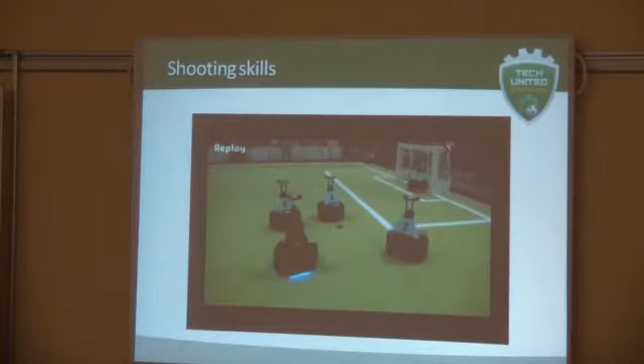Excited, and I'd like to present some work on our killing skills, our shooting skills. To illustrate this presentation, I will start with a nice video. This video is a game against CAMBADA, and we make such a beautiful goal. However, seeing this goal, we were as surprised as everybody else that we could make this goal. So therefore, I want to present you today our work on repeating such goals.

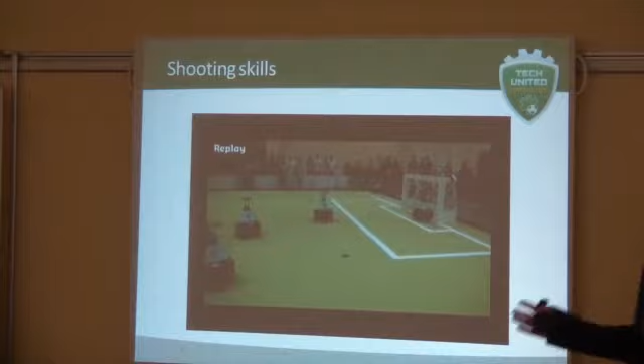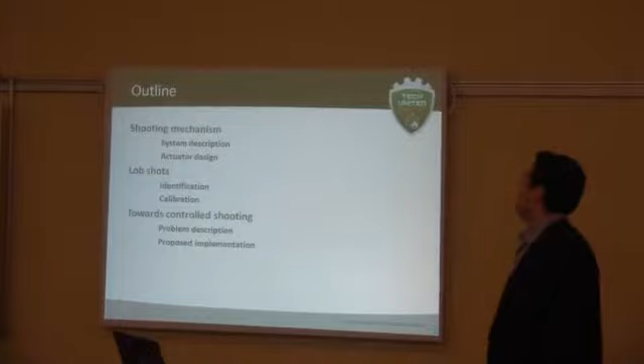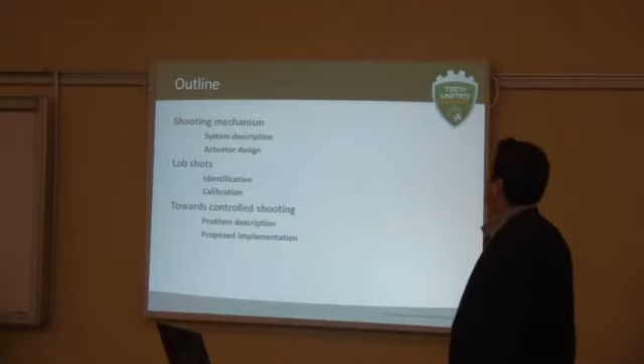First, I go more into detail in our shooting mechanism - what the system is about, the design of the actuator. Then I will continue about our lob shots. First, we have to identify a system and then calibrate it. And then I will tell a little bit about our work towards controlled shooting. I'll tell you the problems we have, and then some proposed implementation.

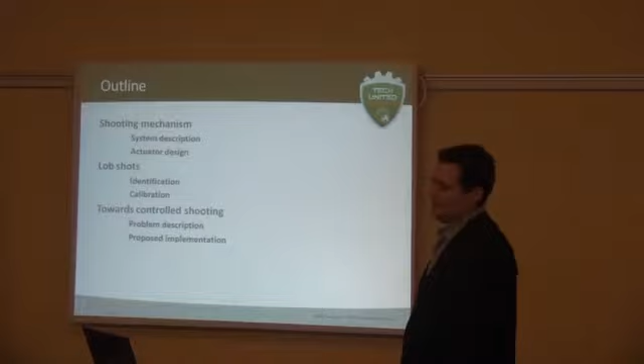So, the shooting mechanism. Before we can design, we need to have some requirement specifications. We want to have a controllable shooter, which can shoot hard, soft, can shoot a lob shot or just a flat shot, and of course, very important, repeatable.

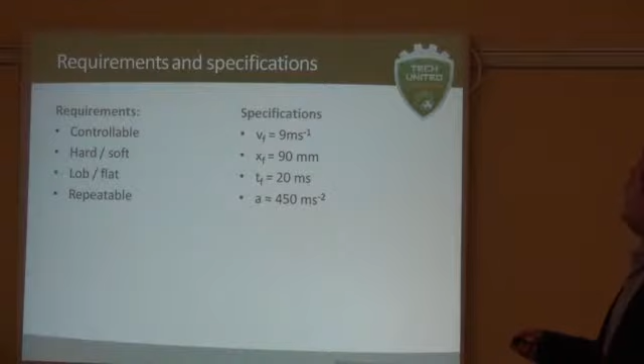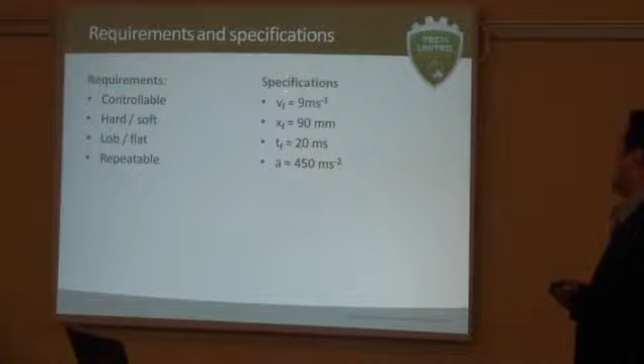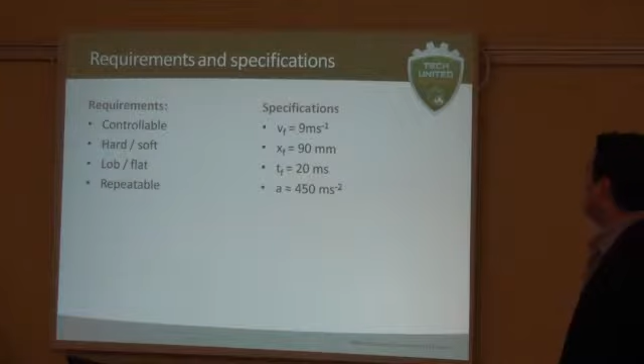As these are rather vague terms, I'll come back to these more later in this presentation, but we also have some hard specifications, such as we want to have an end speed of 9 meters per second of the actuator. The moving part moves 90 millimeters, and it should all happen in about 20 milliseconds. We want to approximately have 450 meters per second squared acceleration.

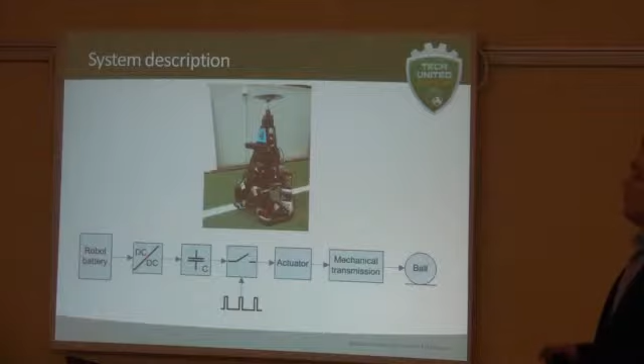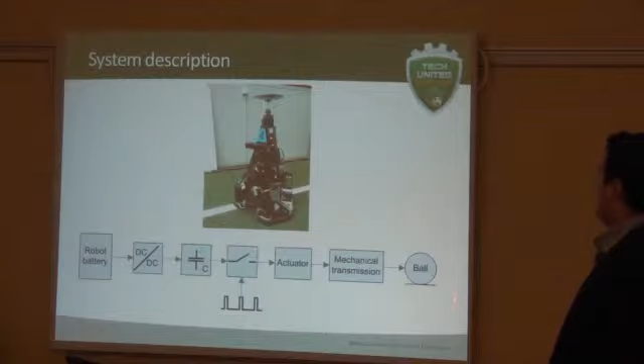So the system - the shooting system is built up from our robot battery. We convert that to about 350 volts into a capacitor, and this capacitor, by using an IGBT and a PWM modulation, excites the actuator, which then has a lever and a pin on it, and it will shoot the ball away. Now for this moment we go more into detail in the actuator design.

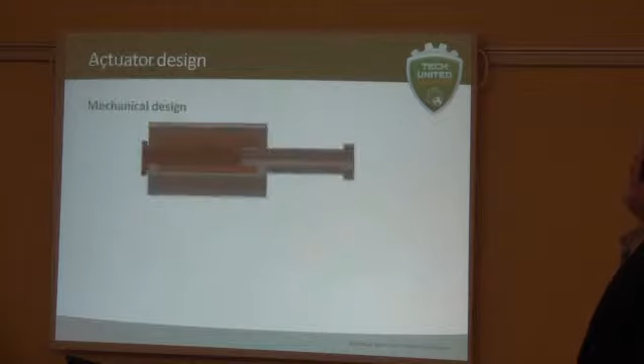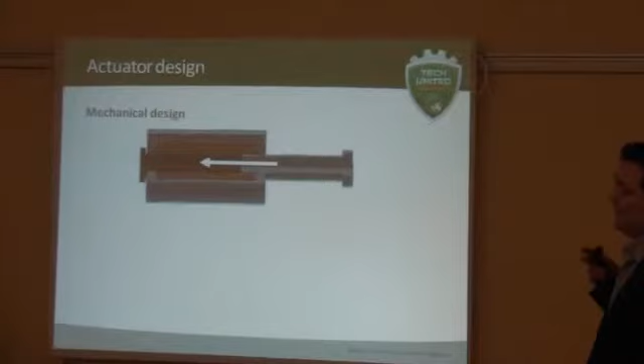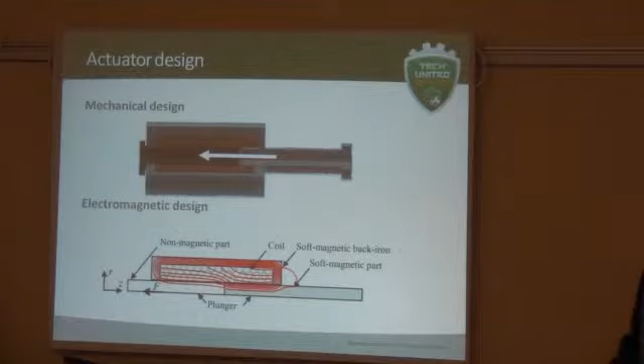The actuator design has a mechanical design, so it has a stator and it has a moving part. This moving part will move in this direction. Looking at this design electromagnetically, we can see a soft magnetic part in the back, a magnetic part of the plunger, and a non-magnetic part of the plunger. By exciting the coils, we create a magnetic field which will attract the soft magnetic part, and therefore it will shoot, it will go in this direction.

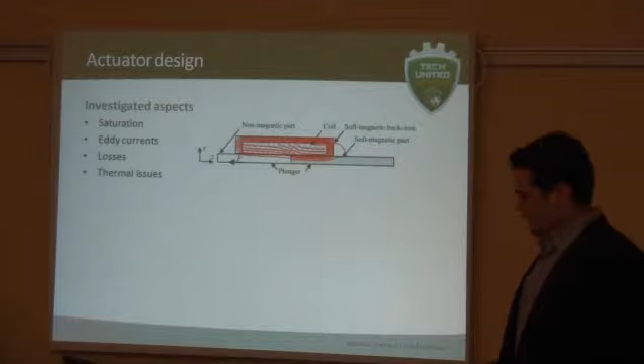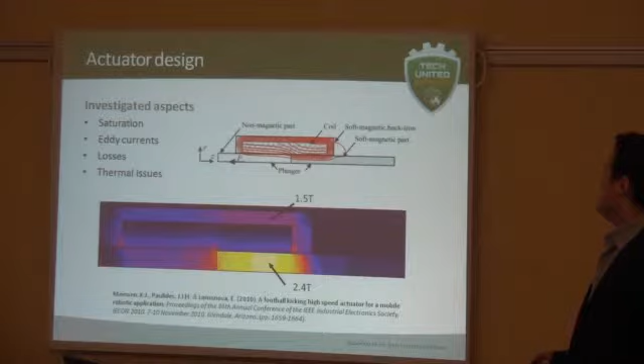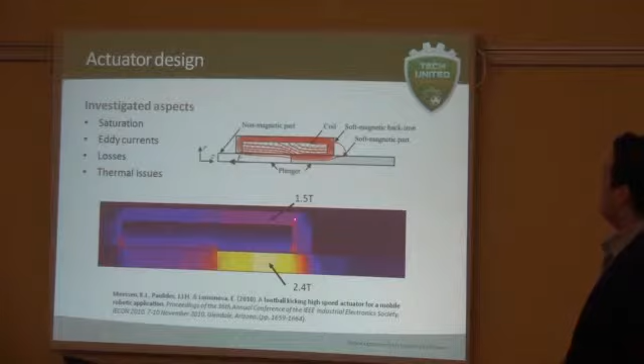In this design we had to investigate several aspects, such as saturation, eddy currents, losses, and thermal issues. First we looked into saturation - how much current can we excite before we get into saturation? On this picture you can see we designed the actuator in such a way that we reach the top of the linear part of the saturation curve, so we get the best losses, current, and force ratio. As you can see, it's nice, about 2.4 Tesla here, and in the back of the stator it stays nicely unsaturated for 1.5 Tesla.

Then we have the final design, which came at a 4.5 kilogram total mass. We have a peak force of 700 Newton, and the peak current is 110 amps. So we generate 700 Newton by exciting 110 amps in just 20 milliseconds.

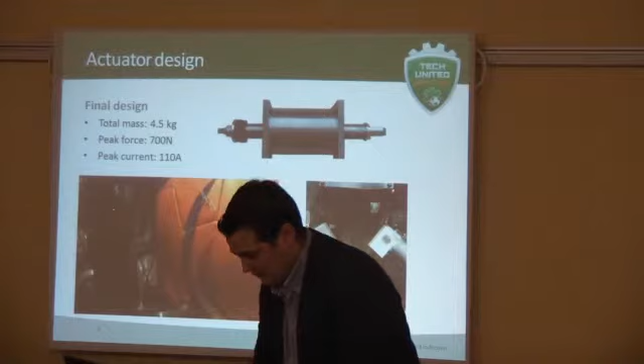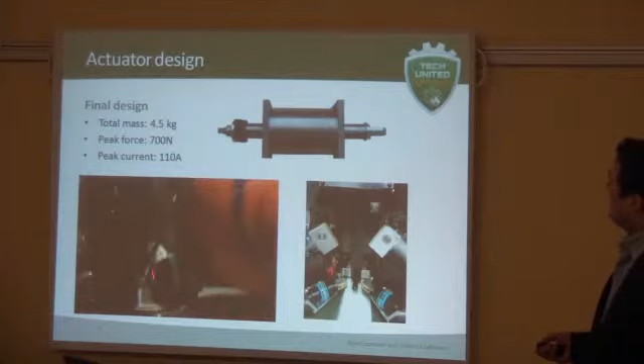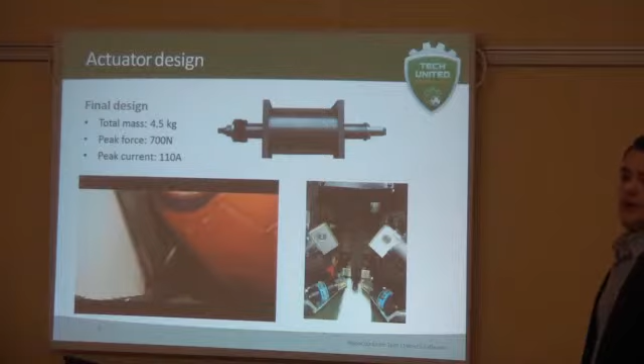Shooting at full power, shooting a lob shot at full power. In this movie, you really see the power which comes free, because the pin really goes into the ball. So there's a lot of power that comes free.

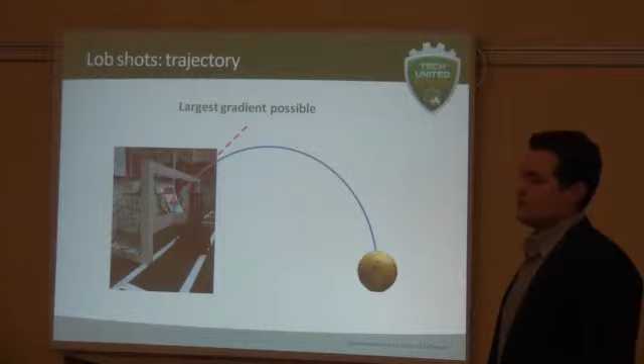Well, now we have such a power, but we also need to know how to use such force. So therefore, we want to use it for lob shots. Now for lob shots, the idea is to shoot between the keeper and the goal crossbar. And to do that, we want to have a trajectory that has the largest gradient right at this point - basically, it has the maximum height here. Applying this constraint, we have a lob shot.

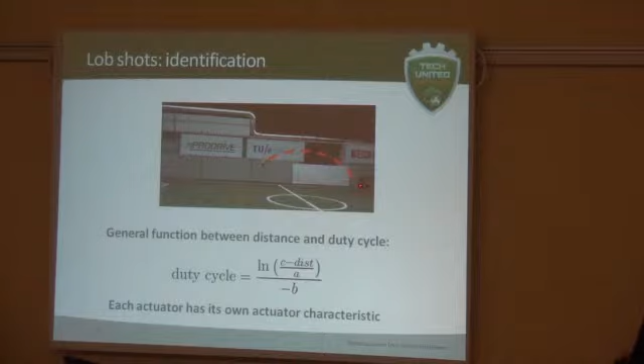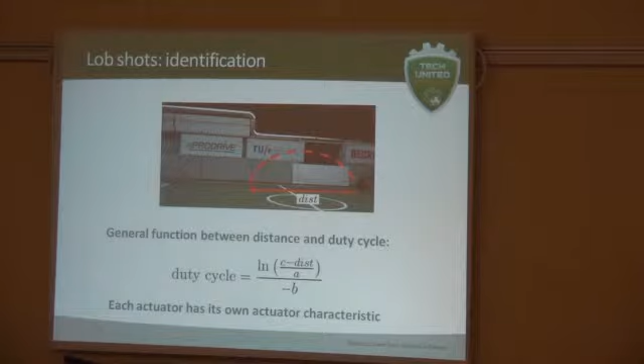We first need to know what kind of relation exists between the duty cycle of the system and the distance we can shoot. We identified that it should be an exponential function. So we have a duty cycle and a distance, which depends on three different parameters, C, A, and B. But from our tests, it appeared that each actuator has its own characteristics, so therefore we have to calibrate each turtle individually to find out what these three parameters are.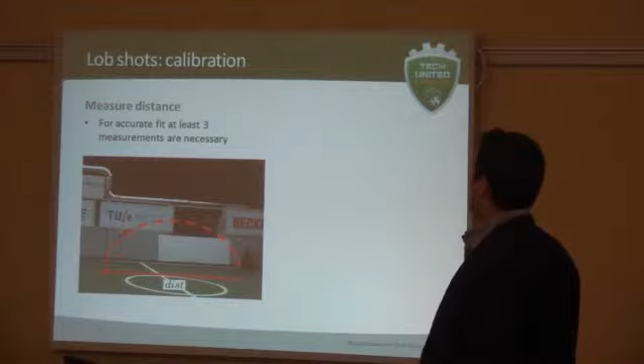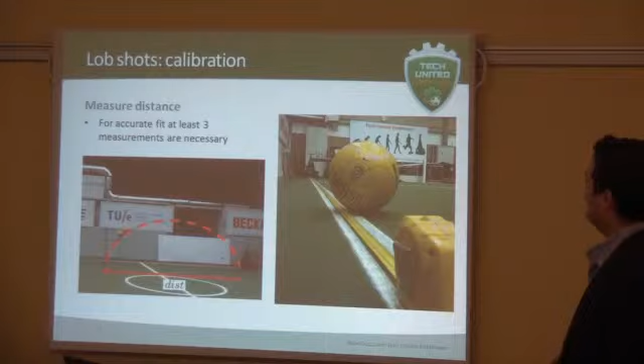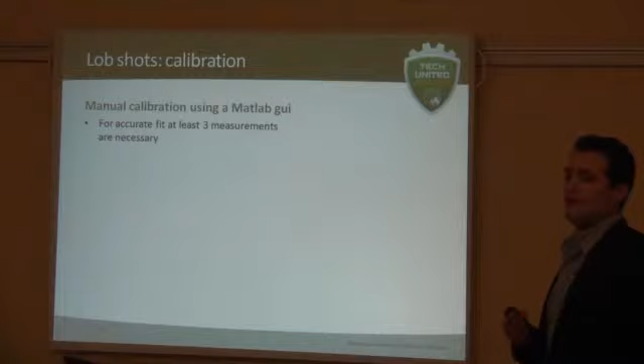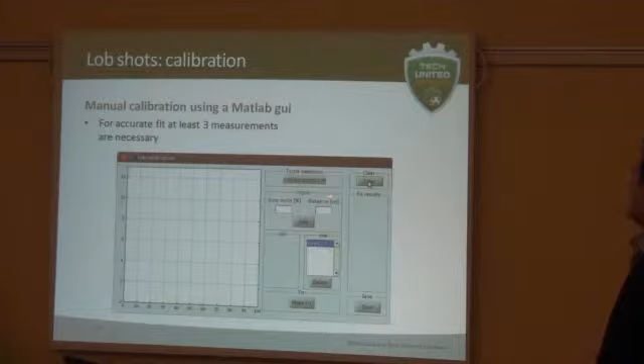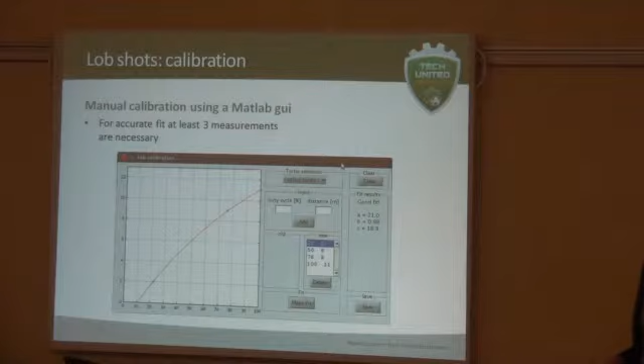On the tournament we want to do this as fast as possible, so we have more time for development. So we developed a calibration GUI. In this calibration GUI we can select the turtle, we have some input where we can place the points, and then just say make a fit, and it calculates the unknown parameters.

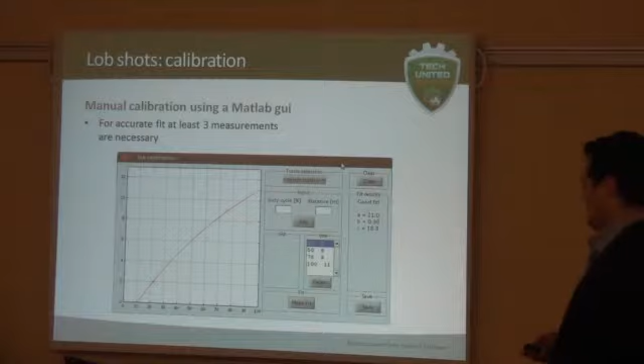It just copies these parameters to the turtle and we have calibrated. So at this point we can shoot, we can make a lob shot and we will know at which distance the ball will end. However, to make the perfect lob, we want to shoot just beneath the crossbar.

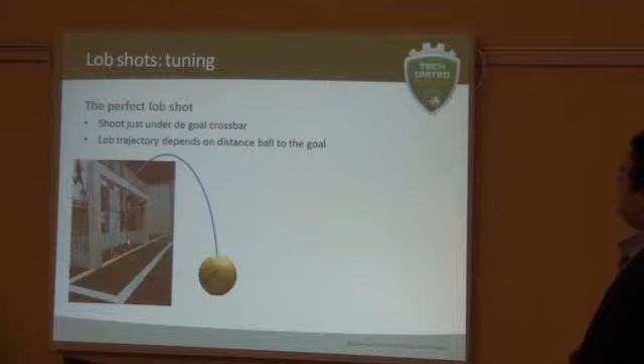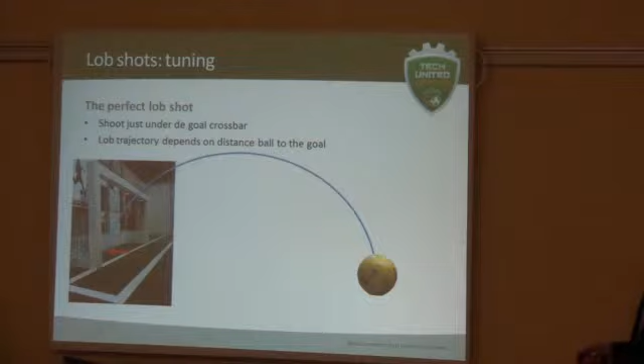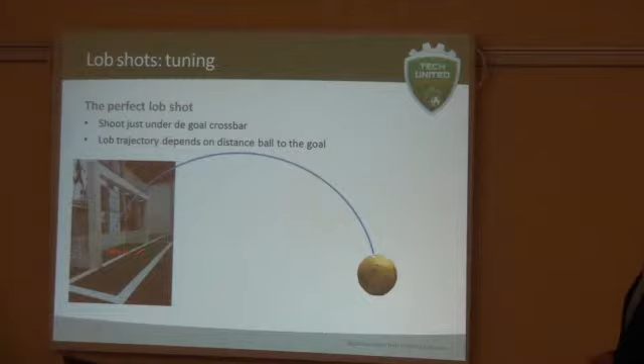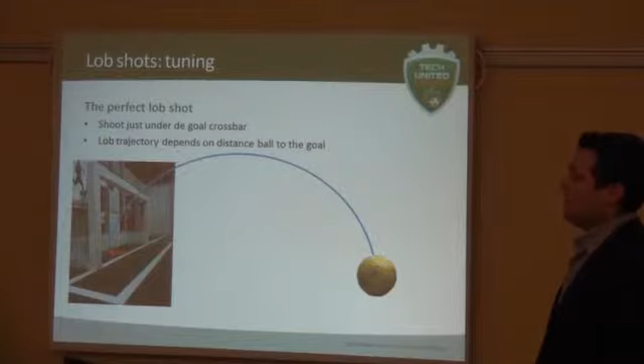So the distance from the ball to the point the ball needs to land depends on the distance between the ball and the goal. So this length we still need to tune. We do that because we know the distance to this point, we know the field, we know where the turtle is, we know where the ball is. So for this correction, we can calculate it by a linear approximation.

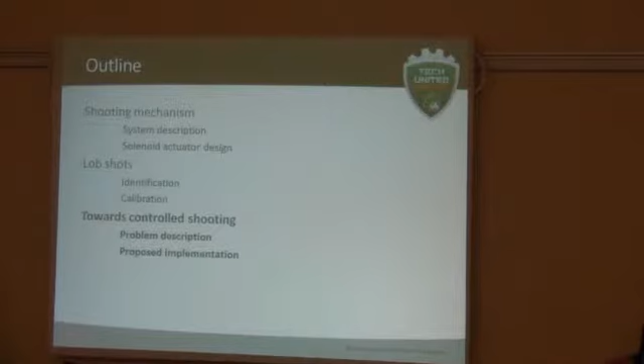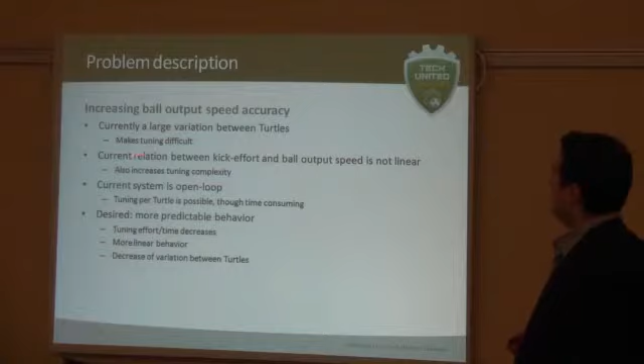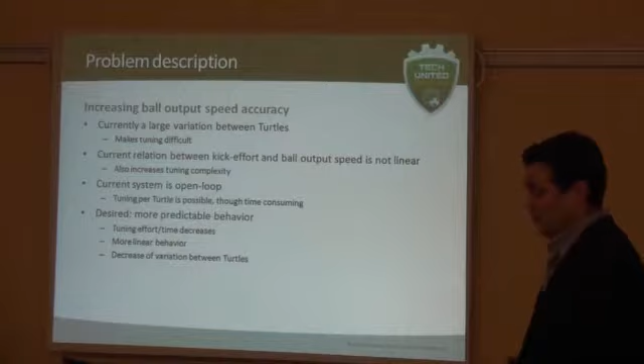Now we have lob shots. However, it's still a lot of work to calibrate for each turtle, because there's still some variation, which makes the tuning difficult. Furthermore, the relation between the kick-effort and the ball output speed is not linear, so this adds another layer of complexity. The current system is open loop, so it's just feed forward. We can only hope the calibration is correct, and it is especially time consuming.

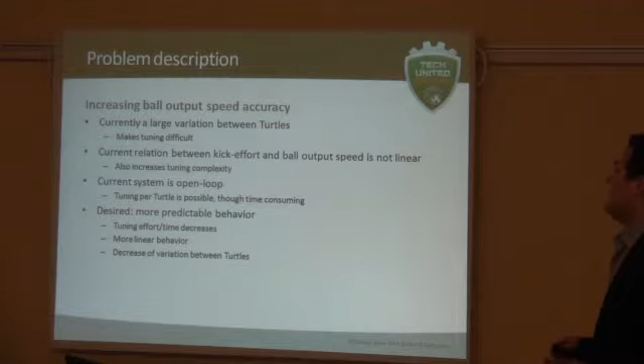So what do we want? We want a more predictable behavior, which will decrease the tuning effort, more linear behavior, and we want to decrease the variation between the turtles. So when the turtle has to shoot, it should exactly land where we predicted it should be landing.

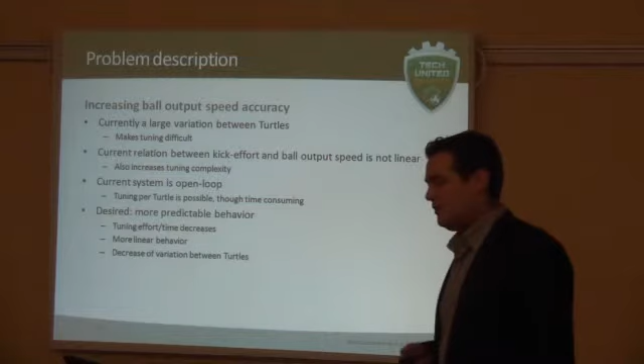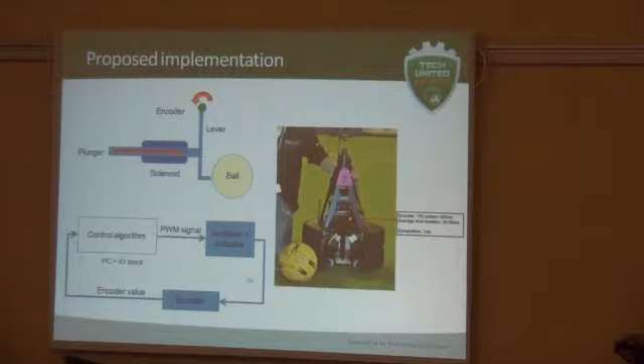So the proposed implementation is that we have an encoder on top of the lever. This encoder will give the position of the lever, the angle of the lever, which is attached to the plunger, and when it will shoot the ball away. So what we propose is that we have a control algorithm that controls the PWM signal that will be sent to the amplifier. Then the encoder gives feedback, and we can again adjust the PWM signal.

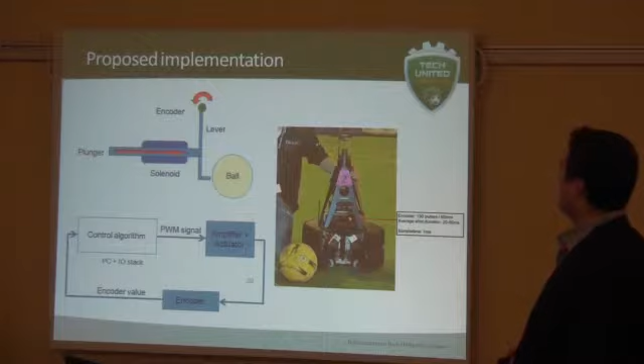We already have something similar. The idea is that instead of just shooting at maximum power, we first set the pin against the ball and guide the ball, like curling, to its end velocity. However, of course it will never be exactly like curling because it's a ball and we want a reasonable output speed, so it will be somewhere in between.

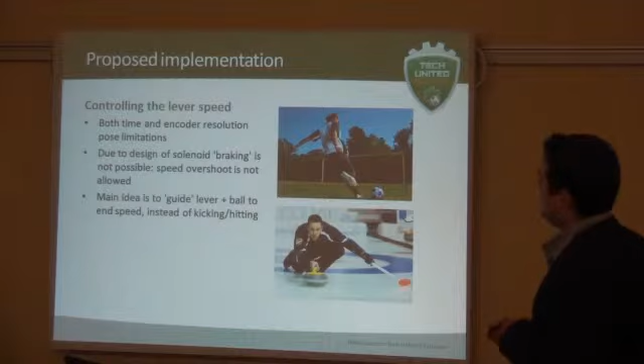Further, we have to consider some limitations because the encoder resolution has limitations. So when shooting at full power, we cannot control it anymore because it goes too fast. Furthermore, we cannot brake, so we really have to think before exciting the current if it will not be too much. And as I said, the idea is to guide the ball instead of fully shooting at it.

How do you define the ball position? Because the ball is not round anymore and the pin is inside. These are just simulations. What we did is model the ball, so it has some deformation, and knowing its properties you can model the ball rather accurately. So here the ball position is basically the center of the ball.

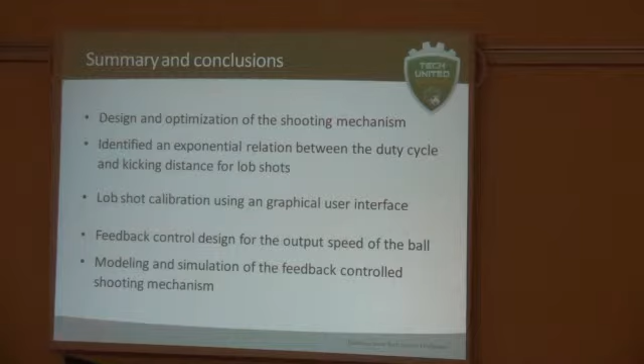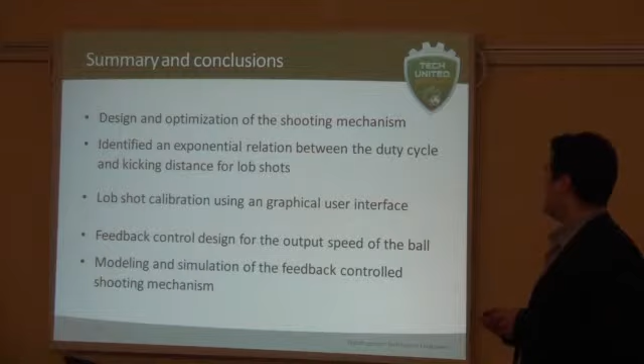This brings me to the summary and conclusion. We have designed and optimized a shooting mechanism which we now use in the turtles. We identified an exponential relation between the duty cycles and the kicking distance for lob shots. We can calibrate these lob shots using a graphical user interface. Furthermore, we have a feedback control design to control the output speed of the ball, and we modeled and simulated this feedback control of the shooting mechanism. Therefore, I want to thank you for your attention.

One of the questions I have: you talked at the beginning of the talk about repeatability. Do you experience some kind of magnetization of the plunger, for instance, if you shoot several times in a short period? Because that will change the behavior.

Normally it's more or less this remanence effect, I guess, from the metal. But I must say we don't really experience changes because of that. I guess the reason is because the amount of magnetization we put into it, we really go to 2.5 Tesla, so the resting magnetization in it is almost negligible.

If you want to guide the ball more, can't you go from a pin to more of a surface? That's an excellent question, because we have also had some internal discussion about this issue. At this point we don't know exactly yet, but we are testing, instead of a pin for guiding, having a surface that exactly fits the ball, so we can control the aim.

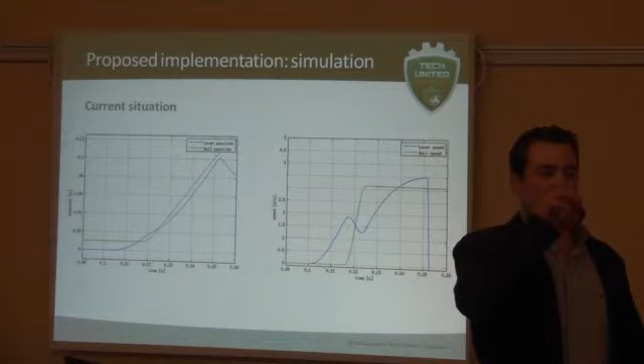Yeah, that's another question, because of course the real ball is completely different depending on what it is. Yeah, exactly, of course. You have spin, so depending on the point you hit, you have a different result. And that's something you have to live with. Yeah, some deviation, but these differences are also more distinct due to the condition of the surface. Yeah, you're right about the surface, that. Yes, you're right about that. Yes.

So are you using that calibration in the game? Is that during the game, to shoot, to kick the ball? For the lob calibration, you mean? Yes. So no, that's before the game. So you do it before, when you start. You calibrate before, and you use those parameters when you want to kick in the game. Yeah, for lob shots. At this point, only for the lob shots. The flat shots, well, you don't.

Yeah, the distance is... Do you do any correction with the robot, the velocity? Yeah, you also encounter robot velocity, you can tune it also. And we're also planning to include correction for the voltage of the capacitor, because when you shoot twice in a short time, it needs about 18 seconds to load. If you shoot within these 18 seconds... after a shot, full power takes 18 seconds. Yeah, that's too long, you always go for the good shots, make a goal. But I want to note, it doesn't require 18 seconds to shoot again - it will not be at full power, but of course to have full power again, yeah.

Okay, and what is the error you have? I mean, at the same distance, shooting with the same power, what is the error you are having? 10 centimeters, 20 centimeters. I was asking because we did similar work and similar research 2 years ago, I think, and we actually came to a function where we would input the distance, input the height of the ball where we want the ball to pass at that distance. At the end of the day it worked well, and the other day in the morning it was completely off. Okay, like 10 or 20 centimeters.

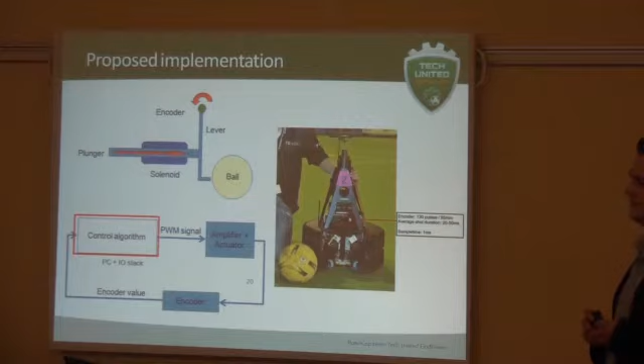What kind of sensor do you use to determine the angle of the shuttle? Because there's an encoder, and this is - how is it exactly done? It gives a position, how is it exactly done? It's an optical encoder, an incremental disk. Oh okay, so what's the speed of it? I wonder, because most sensors are not fast enough to somehow use it for your application. So why - I use the exact same sensors on the drive motors, and we just send them commands, and we can also. Okay.

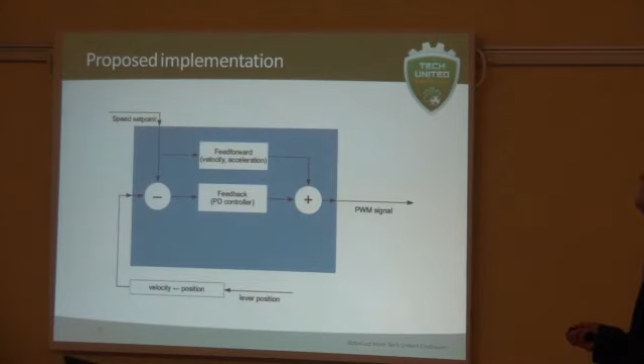But again, the idea for this is also for passes. At passes we don't want to shoot at maximum power, so it's about 50% of our power. We can't shoot at maximum for this idea.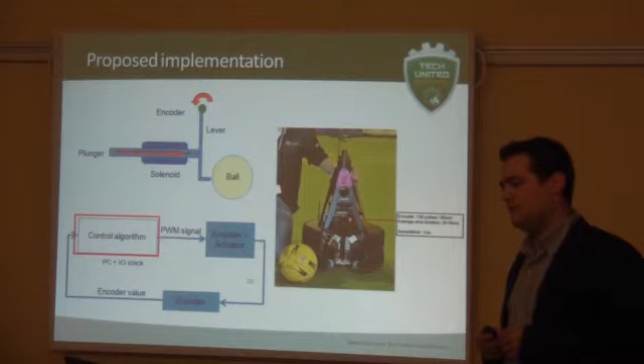Now you have a good model for how you can shoot and what your output will be, and you can calibrate it per robot. But now you get in the field and you have an unknown ball. How do you handle that? Well, the controller should, because then you create an error, and the controller should solve that problem.

Indeed, the identification with the lob shots has that problem. So you really need to check before you go into the end game that the ball should have the right pressure. It's also a problem with this method. There are official balls, meaning they know which balls they're going to play with, and there's a guy who always checks the pressure of the ball. So that's the setup, and things like the shape of the ball or the details are not of influence.

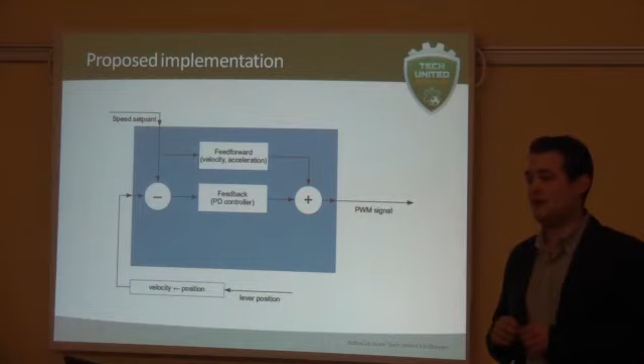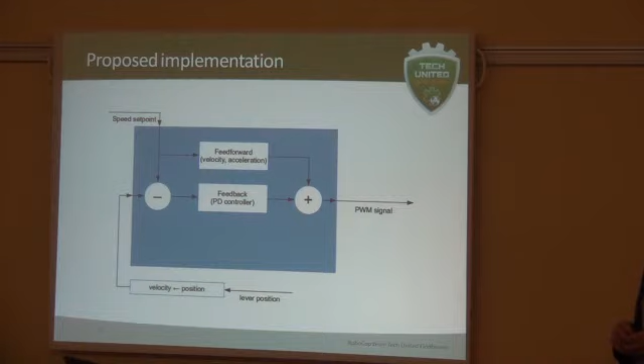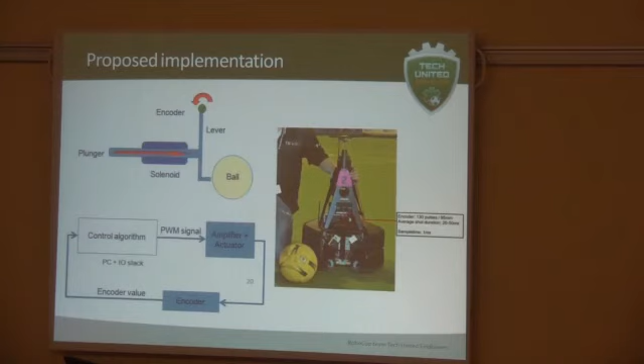It's always complex. So therefore we also use the tuning. We can tune it and say, well, okay, we want it such that 80% of all balls will be in the goal, and some other percentage will be better. That's also in real life, I guess, for footballs. You know, it's also sometimes missed.

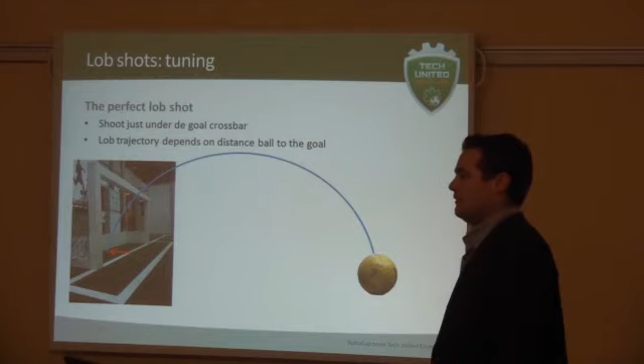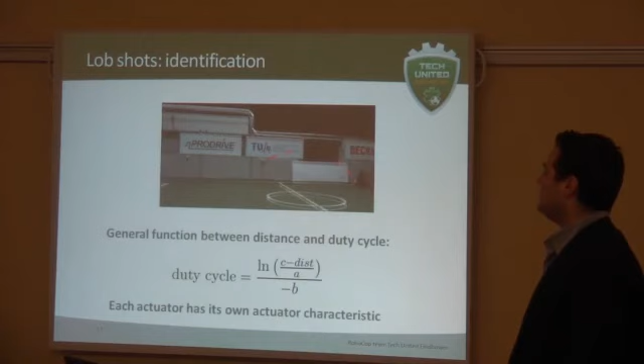Did you make any experience with using coils also on the plunger, so you don't have these problems with magnetic fields? So basically what you do is an induction motor? Something like this, so if you don't have a permanent magnetic field. I must fairly say I don't know the problems that arise. However, I know one of my colleagues looked at it in the past, and from all the different topologies, he chose the reluctance actuator because it has the best performance as we could judge then.

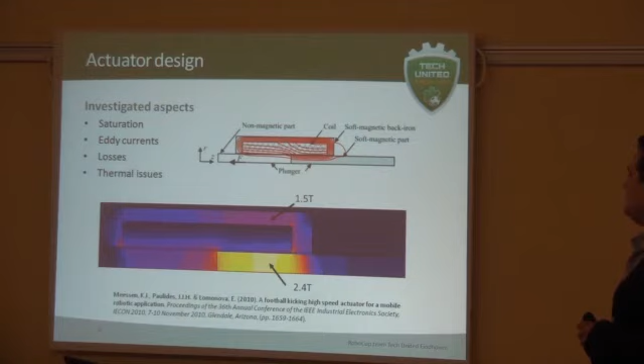I'm not aware why, but it could be an active factor.

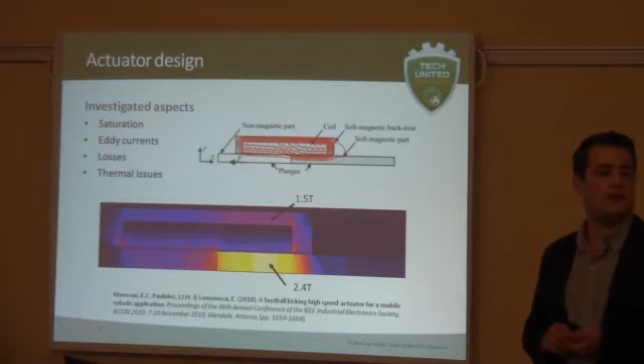Any other questions? Maybe you can go into the second slide with your speed simulation.

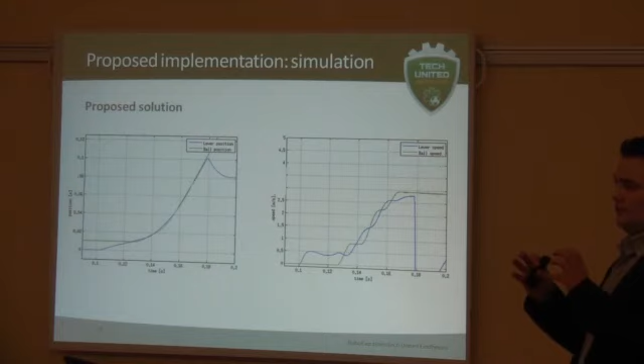Yes, to the settings of this. I think the speed is just the derivative of the position, but there are kind of steps in your function with the speed. Where do they come from? So this is the interaction between the ball and the lever. When the lever pushes, the ball deforms and then becomes the ball again. Ah, okay, that's what you see in this.

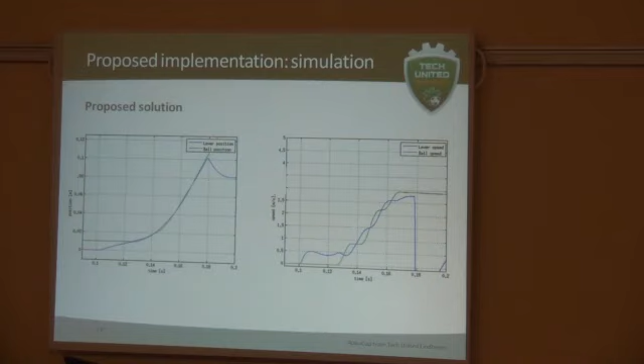You're always trying to get the maximum slope when the ball enters the goal. But would it be better to have a lower slope and maximize the uncertainty that you can get in your shot and still score a goal? Can you have a lower shot, a lower lob? So you mean that you have more chance to be in the goal instead of? So even if your shot doesn't come as you would want, it will still score.

Yeah, but you still have a goalkeeper in front. Yeah, that's the problem. You want to be preferably vertical, just beneath the goalkeeper, just need to get above it. So if the ball stays above it for a long time, within that region where it enters the goal, it's very nice. If you get the maximum slope, the amount of time the ball will enter the goal is quite small. If you have a lower lob, the ball will be in that area for a longer period.